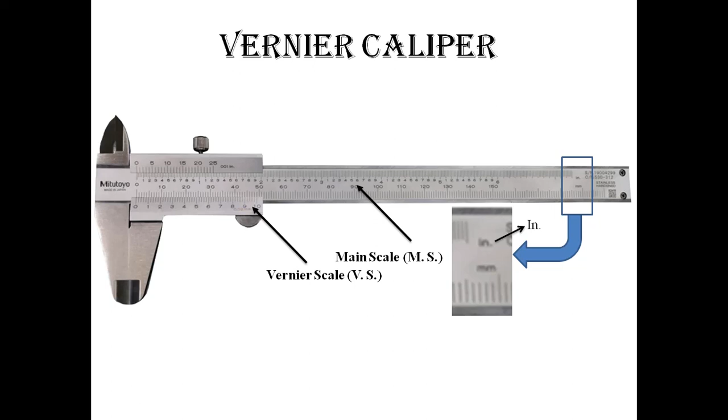There are two types of the error. One is the negative zero error and the other one is the positive zero error. I will discuss them in detail. Here I am showing a vernier caliper having a main scale and vernier scale. There are two types of scale. One is the main scale, the other one is the vernier scale. The upper one is measured in inches and the lower one is measured in millimeters.

Now this is a zoomed part of the vernier calipers. You can see that this is the vernier scale, the other one is the main scale. Here I have selected the two values 0 and 10 of the main scale, and the number of divisions between the two selected values is 10. Now the least count of the main scale is 10 by 10, which is 1 mm. Now you can calculate the least count of vernier calipers by two methods.

Method number 1. In method number 1, the least count of the vernier calipers is the least count of the main scale divided by the total number of divisions on the vernier scale. Here you can see that the total number of divisions on the vernier scale is 50. Now the least count of the vernier calipers is 1 mm divided by 50, which is 0.02 mm.

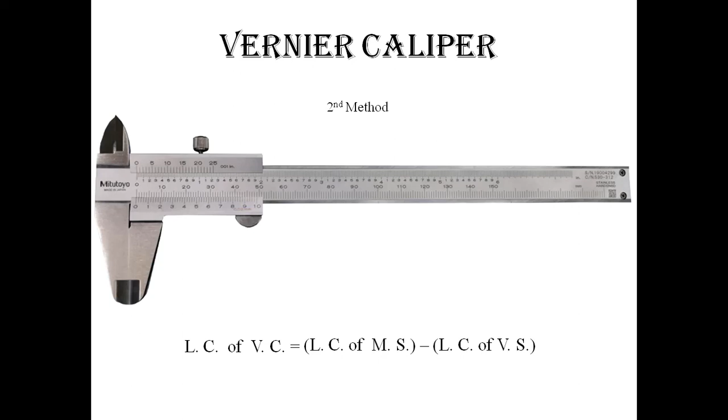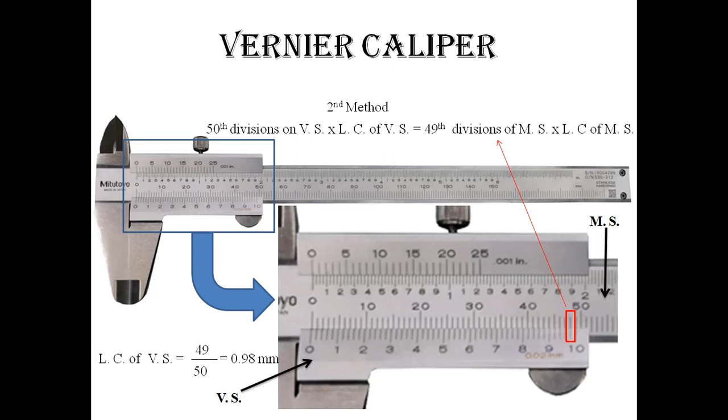The second method: the least count of the vernier calipers is the least count of the main scale minus the least count of the vernier scale. Here again I am showing the zoomed part of this vernier caliper. You can see that the 50th division of the vernier scale multiplied by the least count of the vernier scale is equal to the 49th division of the main scale multiplied by the least count of the main scale. Now you can calculate the least count of the vernier scale as 49 divided by 50, which is 0.98 mm.

Now this is the zoomed part again. You can see that 1 mm is the least count of the main scale and 0.98 mm is the least count of the vernier scale. Now the difference between the two least counts is known as the least count of the vernier calipers.

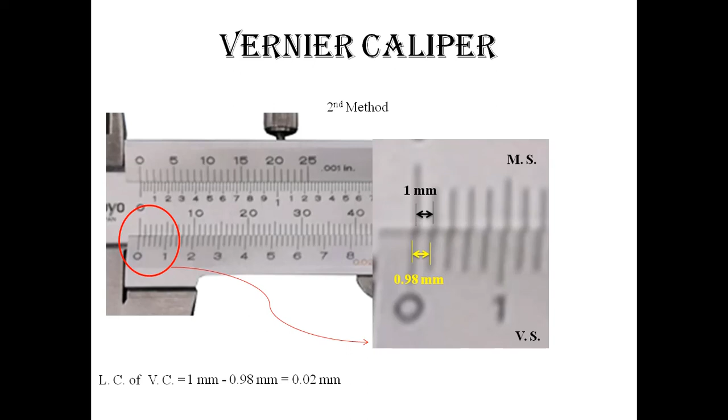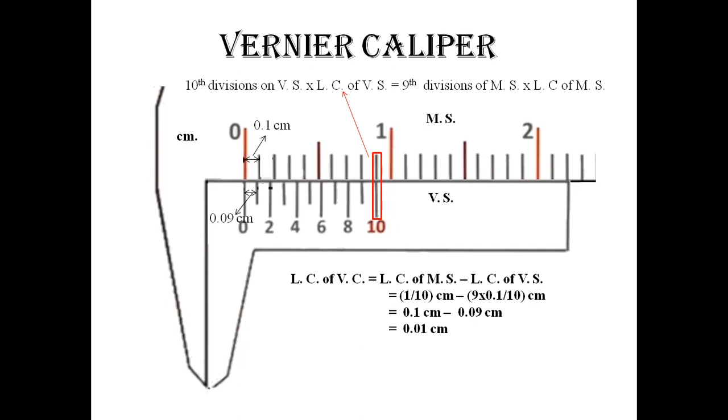Here I am showing another type of vernier scale which is measured in centimeters. Here you can see that the 10th division of the vernier scale multiplied by the least count of the vernier scale is equal to the 9th division of the main scale multiplied by the least count of the main scale. Now you can calculate the least count of the vernier scale as 0.09 centimeter, and the least count of the vernier calipers is 0.1 centimeter minus 0.09 centimeter, which is 0.01 centimeter.

Now here I measured the length of a wood stick. You will count the value plus the number of divisions on the main scale up to the 0 of the vernier scale and multiply by the least count of the main scale. Here is the 0 of the vernier calipers; now count the number of divisions up to the 0 of the vernier scale and multiply by the least count of the main scale. The value is 0 and the number of divisions is 8, multiplied by the least count of the main scale, 0.1 centimeter, gives 0.8 centimeter, the reading of the main scale.

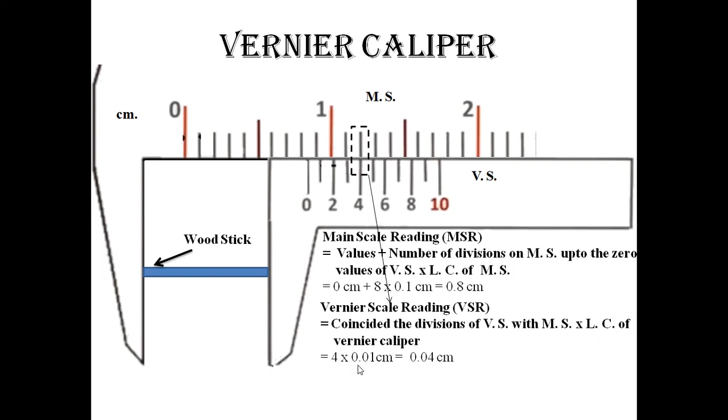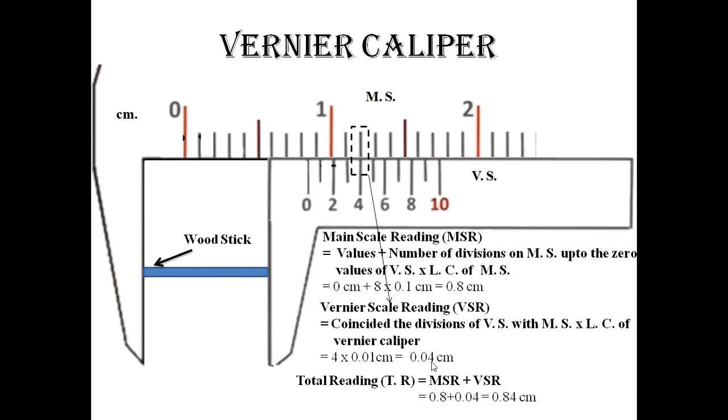Now you will see that here the 4th vernier division coincides with the main scale. The coinciding division of the vernier scale is multiplied by the least count of the vernier calipers. You can see here 4 divisions coincide. 4 into 0.01 is 0.04 centimeter, and the total reading is main scale reading plus vernier scale reading, 0.84 centimeter. This is the total reading, not the final reading. Now what is the final reading?

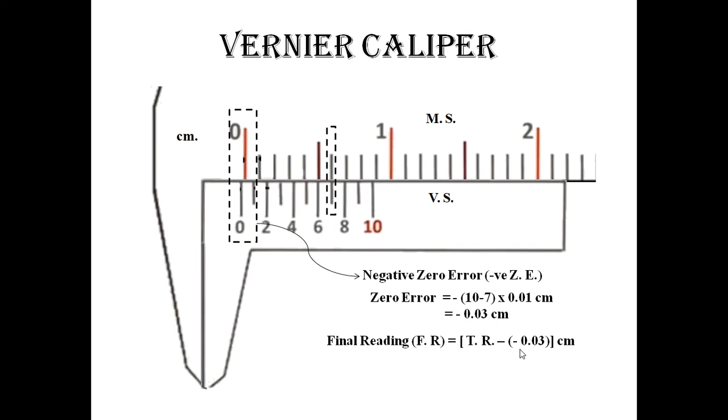When the vernier calipers zero is on the left side of the zero of the main scale, this type of error is known as a negative zero error. How will you find the value of the negative zero error? See which division coincides, count the number of divisions, the 7th of the vernier, and subtract from the total divisions. This value is 0.03 centimeter, negative because it is a negative zero error, and the final reading is total reading minus negative 0.03, the final reading of the vernier calipers.

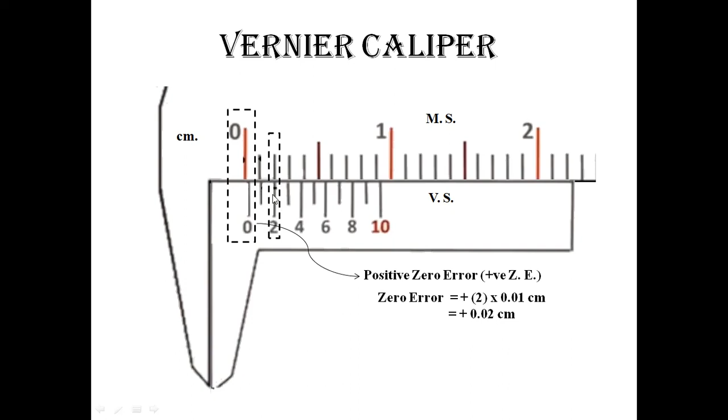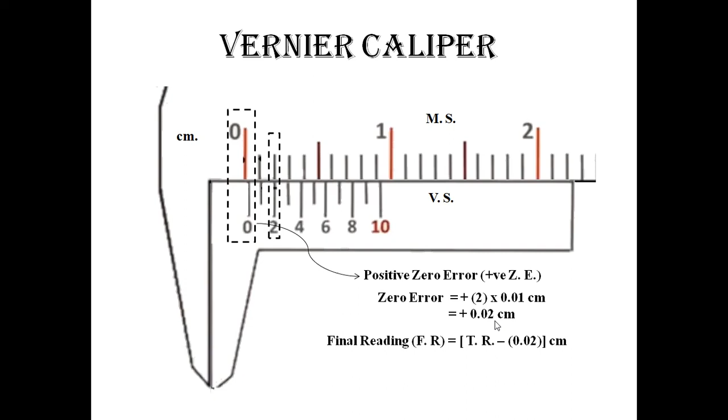Similarly, when the zero of the vernier calipers is on the right side of the zero of the main scale, this type of error is known as a positive zero error, and you will find the second division coincides with the main scale. This is the value of plus 0.02, and the final reading is total reading minus 0.02 centimeter. Thank you.